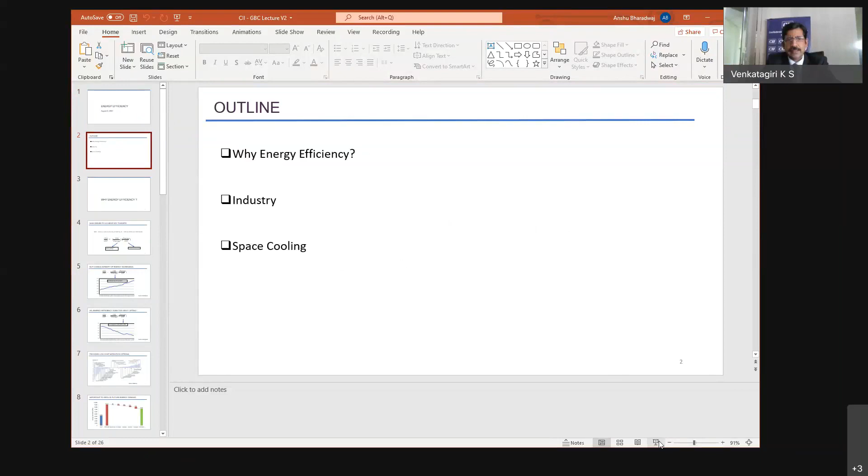So the presentation is broadly structured into three categories. One is why energy efficiency - not that we all know why it's important, but I'll try to provide some new perspectives on why it is important. So why energy efficiency, why is it important?

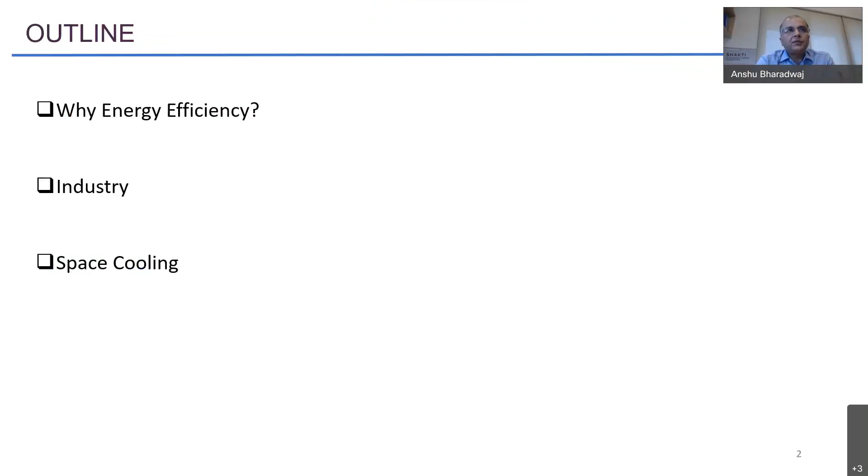And then I'll take a deep dive into two sectors and highlight some issues in industry and space cooling, because I thought these are very important areas where a lot of future action is required as we go further. So, why energy efficiency?

Now, there are several reasons, the most important being that it is the main driver to achieve the NDC targets. As you know, one of the important things we have committed to in our NDCs is to reduce the carbon intensity of our GDP by about 33% by 2030.

Now let's examine this mathematically. Basically, we are saying we will cut down our carbon dioxide per unit GDP by about 33%. You can slice this term into two components: the first is carbon dioxide per unit primary energy, CO2 over primary energy, and the second is primary energy over GDP. If you multiply those two fractions, energy cancels out and you get CO2 over GDP.

This is also a variation of what is known as the Kaya identity, named after the famous Japanese scholar who talked about this. The first term refers to the amount of carbon dioxide we emit to make one unit of primary energy, total energy, not just electricity. This depends upon the fossil intensity of our economy, how much we depend on coal, oil, gas, etc. The second term refers to how much energy we consume to make one unit of GDP, or the energy intensity of our GDP.

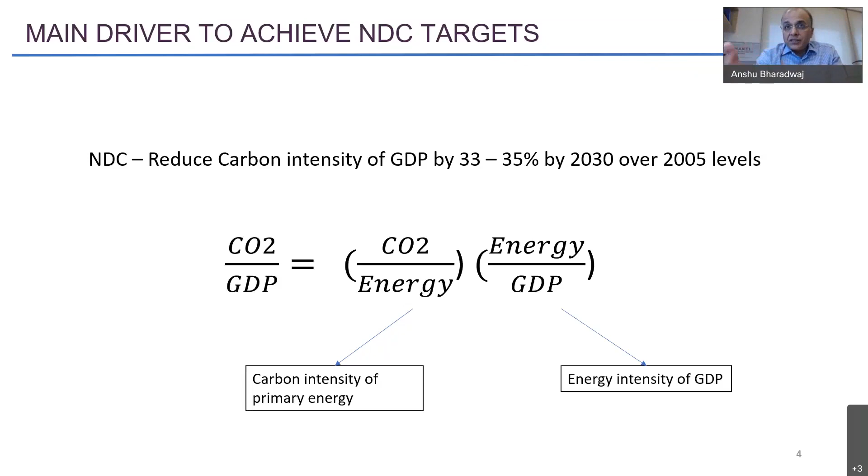Now let's see how each term has behaved in the past. Right now I'm focusing on the first term, which is the carbon intensity of our primary energy. This is an important graph, and I would urge you to think about it a little. This has been continuously increasing, that is, the amount of carbon we are emitting to make one unit of energy has been increasing over the last 25 years.

I'm using World Bank data, which goes up to 2014. But even if I were to take the last 5 years of data, this would still be increasing. Please bear in mind that this is despite all our renewable energy projections of solar, etc. This is an increasing trend.

Now, if we were to project this into the future, and we did this exercise about a year back, if we extrapolate and look at this curve till 2030, my own sense is that this will still be increasing, or at best it might plateau or gradually reach a peak by the 2030 timeframe. But I don't think it will decrease, and this is despite our renewable energy projections, solar, wind, everything. Why is that so?

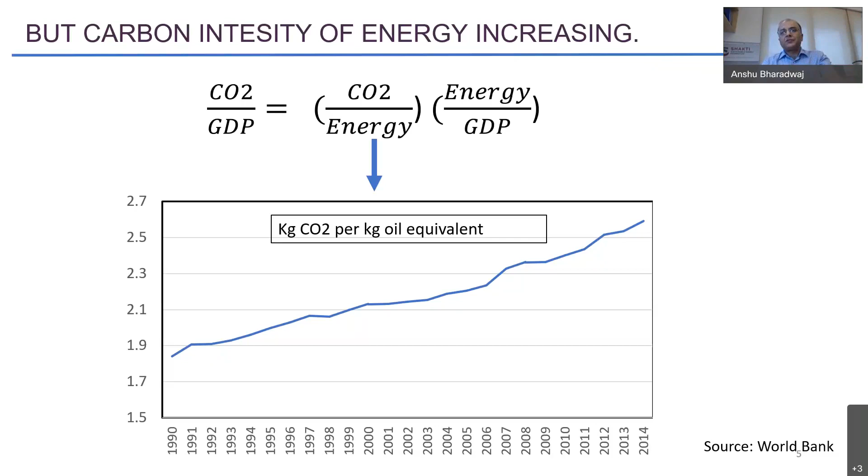Now let's see that graph. This graph plots the energy intensity of our GDP, again over the last 25 years of data. And this, as you can see, is a continuously decreasing graph. It sort of accelerated after we announced the national missions for enhanced energy efficiency. Those missions catalyzed our work in energy efficiency with the adoption of energy efficiency policies across a large number of sectors.

So this puts into context the importance of energy efficiency in meeting our NDC targets. Because unless we, in the NDC timeframe, are able to achieve NDC targets predominantly because of energy efficiency policy interventions. So I thought this sets the context and highlights why energy efficiency is an incredibly important component in our mix.

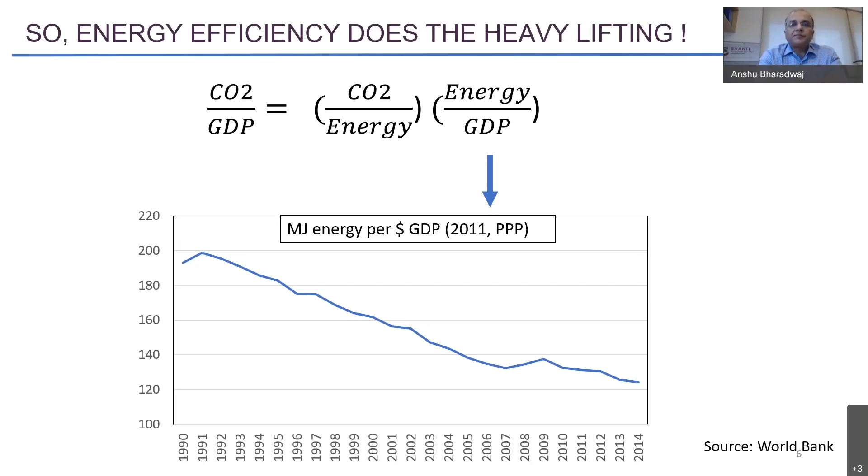Energy efficiency more often than not provides low cost mitigation options. I'm quoting a very famous graph which McKinsey has developed, which many of you might be familiar with, also called the marginal abatement cost curves. On the x-axis, they plot the abatement potential in gigatons of carbon dioxide per annum.

On the y-axis, they plot the abatement cost, that is euros per ton of carbon dioxide. So the width of the graph refers to how much carbon you can avoid, whereas the height refers to the cost. Now, one thing you'll notice is that a large number of interventions towards the left of the graph are all negative, for example appliances, HVAC, lighting to LED, clinker substitution by fly ash, and all those things. Those are all energy efficiency demand side interventions.

Why are they negative? The way they make this MAC curve is that they take an upfront investment which a consumer or the industry has to make, and then they take the annual expenditure. In some cases, the expenditure will be actual outflow, in some cases it will be savings. In most energy efficient devices, it is savings. If you install an LED, every month you have savings which accrue to your electricity account. So therefore, most energy efficiency interventions have a negative abatement cost, which is evident on the left side.

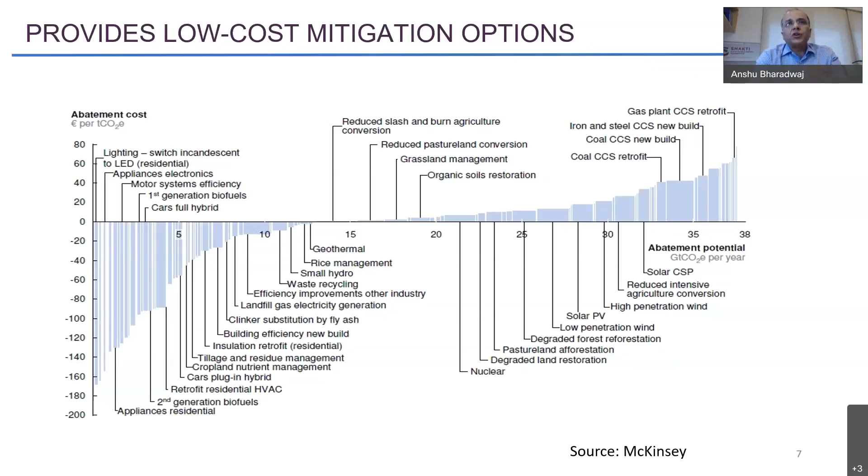And finally, if you look forward, this just plots the primary energy in 2030 and how the primary energy can reduce from business as usual to different levels. As you can see, a significant drop can be achieved by energy efficiency interventions across various sectors, most importantly industry, transport, and buildings, the three big sectors by which we can reduce. If we do a similar thing for 2050, the numbers are even more staggering, and we find that almost 25 to 30% of primary energy can be reduced by energy efficiency alone.

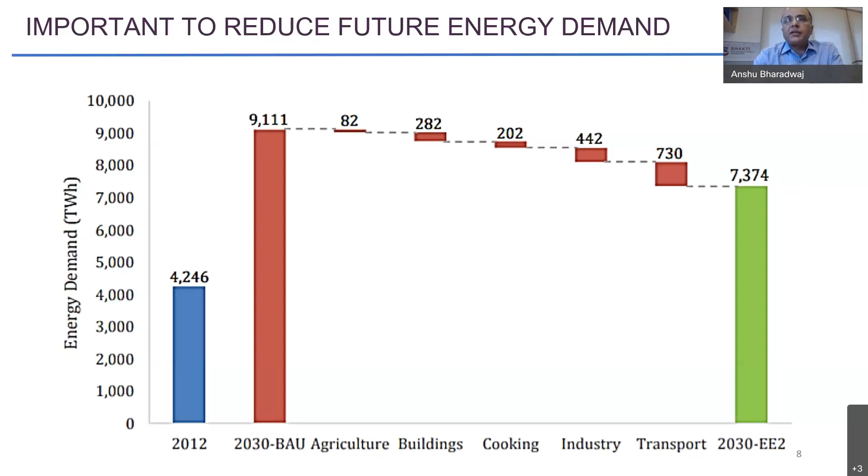So this is just to set the context why it is important. We all know, but it is just to reiterate. Now let me take a deep dive into two sectors and share some perspectives based on what we have done in these two areas. One is industry, and second is cooling.

Again, you are from CII, you all represent industry sectors, so you know this better than me. But as we know, given the way our GDP is expected to grow, industrial output is tipped to increase 3 to 5 times in most sectors by mid-century. I'm quoting numbers which have been quoted by the industry associations. For example, steel, today our output is about 125, 130 million tons. Most estimates peg this to increase to about 400 to 500 million tons by mid-century. Cement, we are at about 500, and that's expected to increase to about 1,500, 3 times by mid-century. And likewise, if you look at aluminium, chlor-alkali, textiles, the various sectors, outputs are significantly higher.

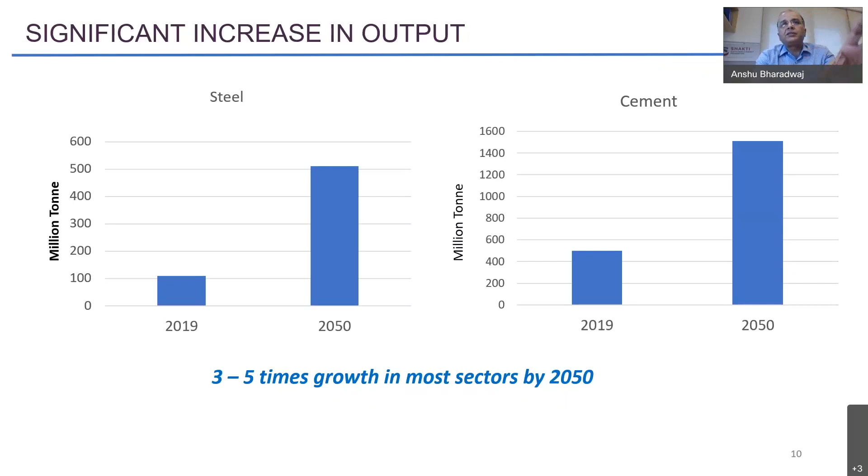I am picking these two because these are the two most energy-intensive sectors. The other challenge which this poses is that industry is a big consumer of coal. This pie chart shows the current coal consumption. Obviously, electricity accounts for about 65%, but the balance is industry. So imagine, even if we were to decarbonize electricity totally by solar and wind, etc., still there will be a large chunk of emissions which will be left behind, which will be industry emissions.

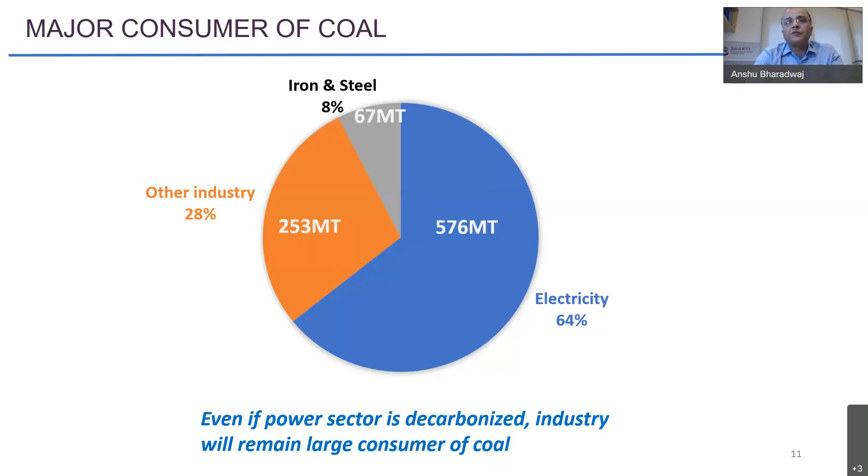And this number will only increase as we go along. In the previous slide, I talked about 3 to 5 times increase. So if we were to project this 20, 30 years from now, we are looking at 3 to 5 times the current emission levels just by consumption of coal and other fossil fuels. This plot highlights what I just mentioned.

Let me take a minute to explain this graph. The blue bars refer to the present emission levels, from electricity, industry, and transport. The orange bars refer to a reference scenario in 2050 in which we don't do much. The grayish bar refers to what if we were to do aggressive decarbonization. Now look at electricity. If we were to really go all out to eliminate coal and entirely rely on renewables, it's possible to decarbonize totally with a combination of solar, wind, hydro, nuclear, etc. We can totally decarbonize.

Industry, the orange bar itself assumes that all future industry adopts best practices in energy efficiency. So even with the best practices in energy efficiency, we are looking at about 2.5 billion tons of emissions from industry.

So that's an important takeaway point, that even with the best practices in energy efficiency, we are looking at about 2.5 billion tons of carbon dioxide in 2050. Now, if we were to look at various interventions, we might be able to bring this number down to less than a billion through various interventions.

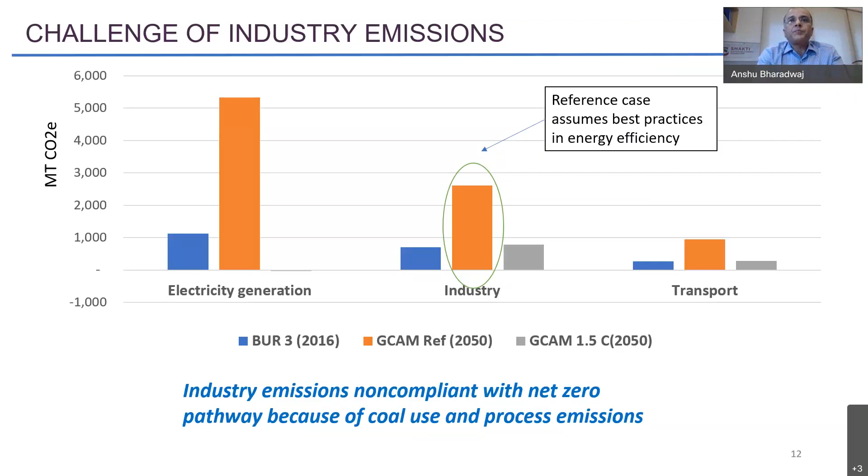So as Mr. Venkatgiri mentioned, in the first phase of our PAT program over the last 10 years, we relied heavily on market-based mechanisms to improve energy efficiency across industries like steel, cement, petrochemicals, fertilizers, chloralkali, and aluminum. It led to significant gains in terms of both energy saved and carbon dioxide avoided.

Today, as the graph on the right shows, this is the specific electricity consumption of Indian cement industries. As you can see, we are much better than the world average. Most of the recent cement manufacturing plants are actually world class in terms of their energy efficiency, absolutely top class. So cement is one area where we have done really well, and we are confident that going forward, most plants will be adhering to the best standards.

Of course, there is scope for improvement in steel. We have a mix of steel plants—some are very good, some are laggards in terms of energy efficiency. Our specific energy consumption on average in steel is still a bit higher compared to many other countries, despite the improvements under the PAT program.

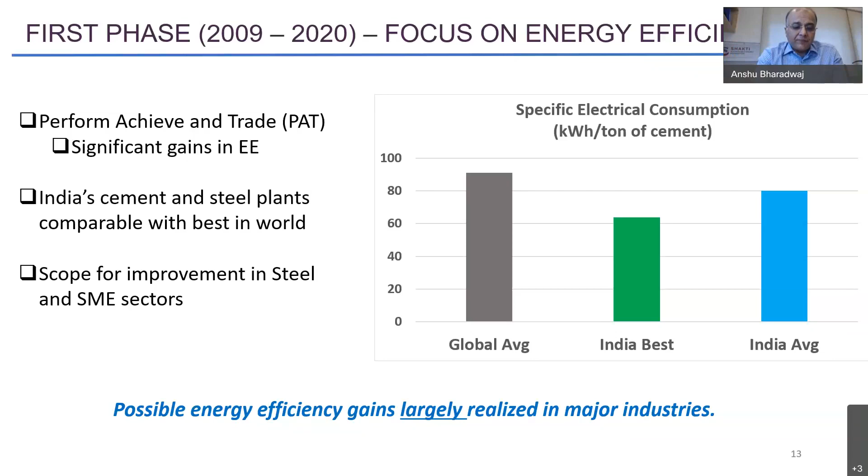So next phase, going forward. Now remember the previous slide where I said that industry emissions will touch about 2.5 billion tons in 2050. And that is despite the best energy efficiency improvements. So how do we mitigate that?

My own submission is that the next phase is going to be much harder. A lot of the good gains which we accomplished in the last 10 years were great, but I think we need to be prepared for a harder next 10, 20 years to mitigate about 2.5 billion tons. And there we'll need to look at things such as reducing demand of products, circularity, fuel switch, and shifting to electrification.

New technologies such as green hydrogen, CCS—I put three big question marks because I don't understand whether CCS is possible or not, whether it is technically, economically viable. I don't know, honestly. But that's one option being talked about, so I put it there. And energy efficiency, of course, for the residual sectors like SMEs and some others. But we'll have to focus on a collection of all of these to look at the next phase of industrial transition.

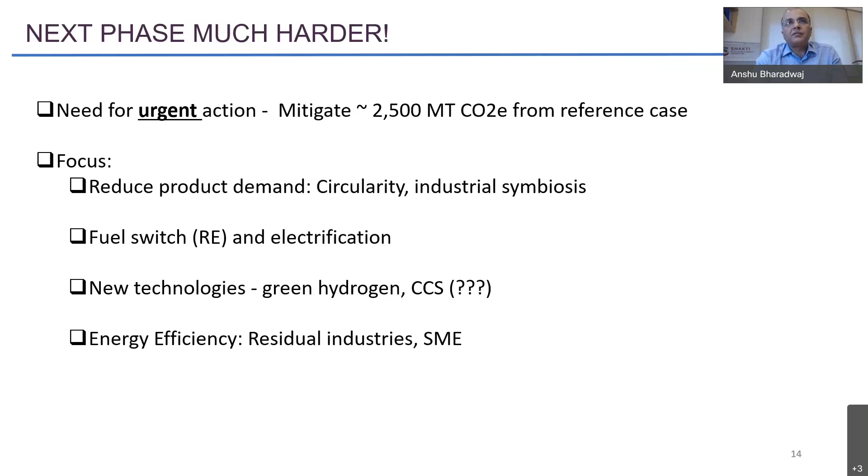This is an example I've taken from a recent report by TERI, where they examined the low carbon steel sector, and Shakti supported this report. So let's look at steel emissions in a business-as-usual scenario, where we continue with the current trend, and there we end up at about 800 million tons of carbon dioxide by mid-century.

If we were to improve the efficiency of our steel manufacturing, make sure it adheres to global best standards, that 800 comes down to about 700. So yes, there are residual gains to be made, but again, there is a limit. We can reduce by about 100 million tons by mid-century.

What if we were to do resource efficiency, recycling, and all kinds of things, where we reduce the commodity demand itself so that we manufacture less steel? In that case, we can bring down the 800 to about, say, 500. So I would say that is really the limit.

With the current set of steel manufacturing technologies, which mainly rely on blast furnace using coke—so if we really want to get to zero or close to zero, we will have to look at technologies which include hydrogen's use in the blast furnace to eliminate the use of coke or coal. That looks like what is emerging from this analysis.

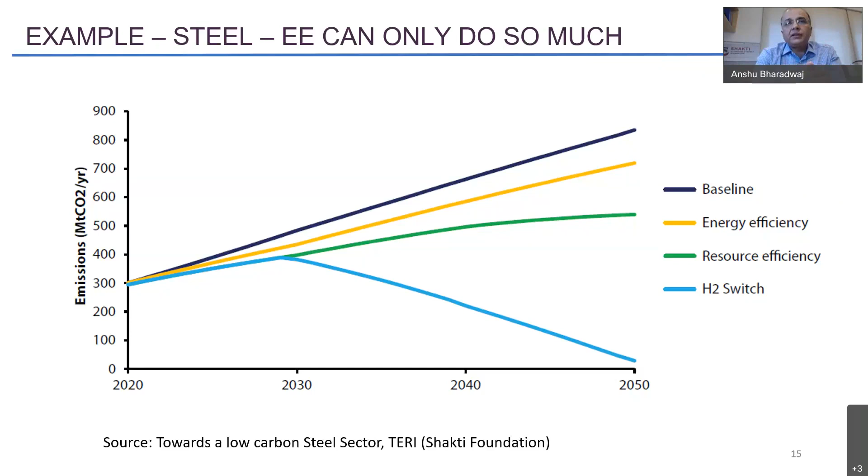So with that, that is a summary of what we discussed in industry. Let me give you some flavor of the space cooling sector and why this is an incredibly important sector, in about 10 minutes, and then I'll stop for question and answers.

This graph, I think, summarizes the need or the importance of this sector. This basically shows the global stock of air conditioners from now to 2050. India is the yellow band. If you look at today's scenario, that is 2020 or so, that yellow band is barely visible. We are a small fraction of the global stock of air conditioners. Whereas by 2050, by all projections, it is tipped to account for about 20 or 25% of global stock.

That's a very staggering number, considering the population base we have. In fact, today about 8% of India's households have ACs. That number is expected to increase to 50 or 60% by mid-century. So you can imagine the staggering growth that we're looking at.

And if you add to the fact that we are looking at more and more intense summers and heat, it only makes the case that much stronger. I recently attended a talk given by Mr. Chandra Bhushan of iFOREST, and he made a very nice statement that cooling is no longer a luxury. When we were growing up, during my childhood days, we could never imagine an air conditioner. It was totally unaffordable. Even a home cooler was a luxury, the one home cooler system. But now, with the kind of summers we are having, I would say cooling is a necessity, not a luxury anymore.

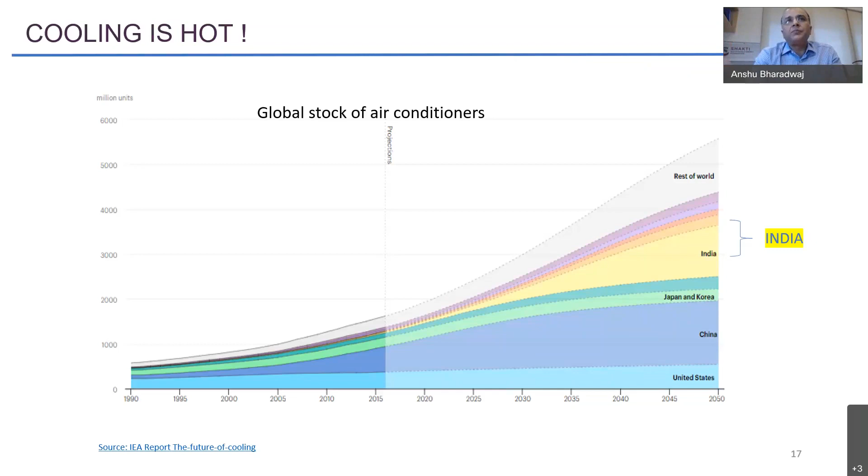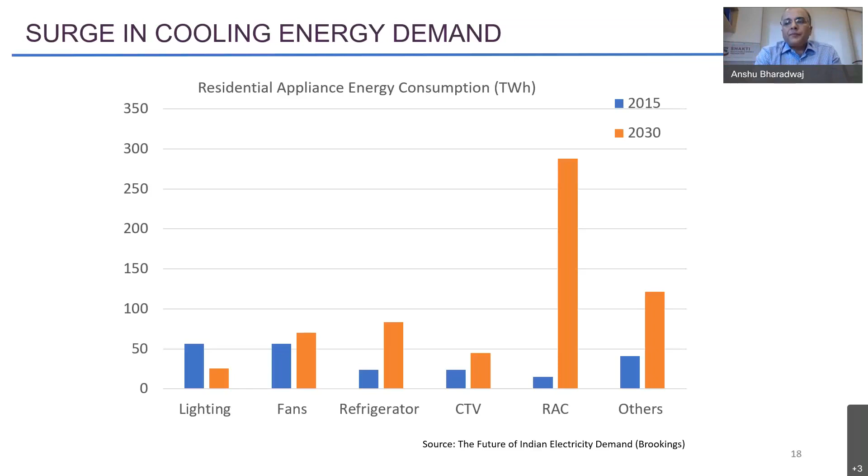So what you can make out is that we have two very sharp peaks. One is the afternoon peak, which is largely commercial, industrial, driven by that. What is important is there is a very strong and sharp night peak. That's when the domestic air conditioners come online and they run through the night. So we have a very strong continuous peak in the night at about 2000 megawatts in this area, which comes under TPDDL.

The take-home message here is that not only are we leading to a gross increase in energy, but we are also leading to peak demand. This is a very strong deterrent to renewables, because at least as far as solar goes, solar can help meet the afternoon peak, but solar can't help the night peak. So this only highlights the need to address this problem of reducing the cooling demand, reducing the energy demand from cooling, through efficient appliances as much as possible. Even if you can reduce it by 500 megawatts in this region, that's equivalent to one coal power plant.

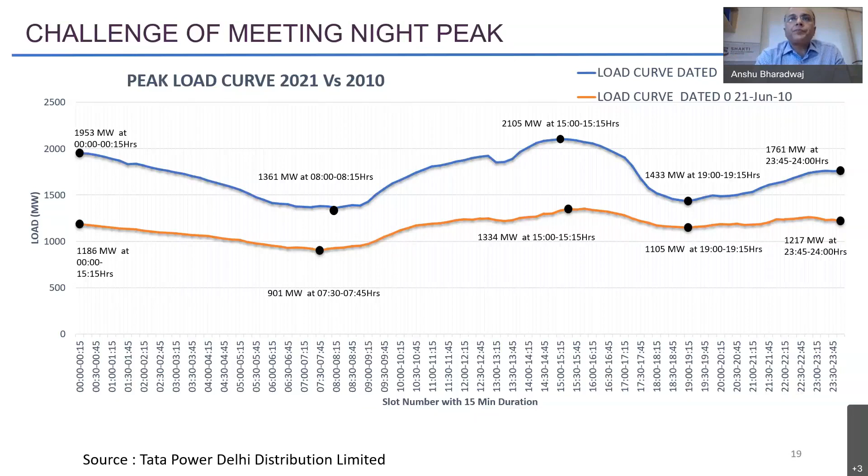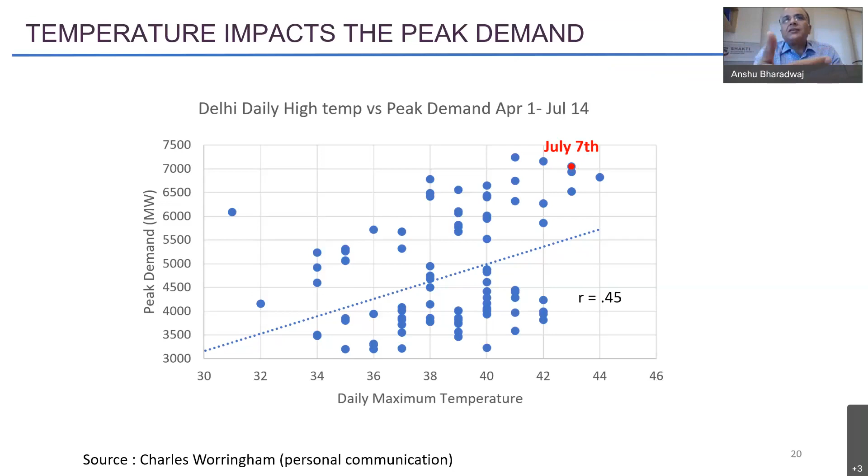And there was a rough trend which emerges of the correlation between the two. So this only highlights the need for energy efficiency and the need to address cooling demand.

Whereas if you compare that with countries like US, it's about 4, China is a little more than 4, Korea about 5, Japan around 5, and so on. So most of the ACs sold in India have an SEER of about 3 watts per watt.

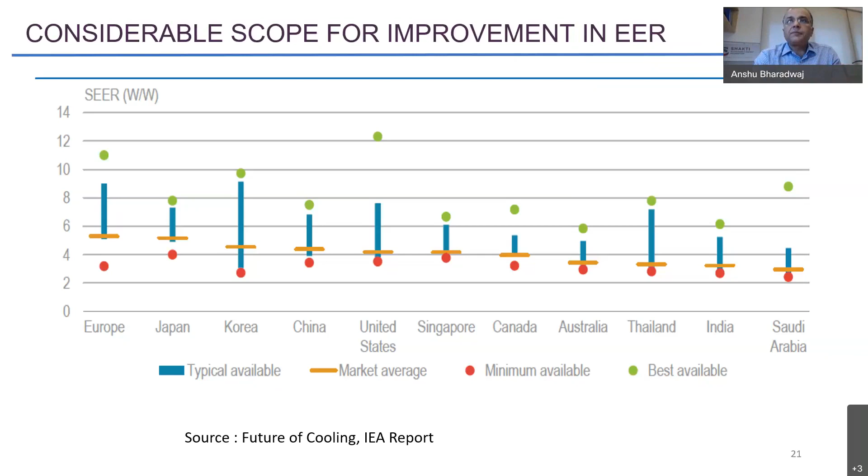So there's a lot of room for us to improve the energy efficiencies of the ACs sold in India. And as you saw in the previous graph, if we improve the energy efficiency of the ACs sold, we can significantly bring down both the peak and the gross energy consumption. But how do we expedite the adoption of 5-star ACs, and how do we go even beyond 5-star to more efficient ones available in other countries? Obviously, cost is a big deterrent.

I'm sure, as Saurav must have spoken in his earlier seminar, EESL has various options or models to reduce the cost of the appliances, but the challenge still remains in adoption. There are various ways by which we can bring down the upfront capital cost, consumers can pay as you save, etc. But I think a lot more needs to be done to ensure adoption than what we have done so far, and at a much faster pace, because the market is increasing very fast, whereas the adoption of policies has always lagged behind.

The other challenge with air conditioning and space cooling is the refrigerants. This is, I suppose, known to all of you, that the refrigerants we use in our cooling systems are either HCFCs or HFCs, and in some cases we have hydrocarbons or R290.

Under the Montreal Protocol, we have progressively moved away from this. We have completely phased out CFCs. We are on the verge of phasing out HCFCs, but HFCs are currently the bulk of the refrigerants being used in India. There are a few notable exceptions, such as Godrej air conditioners, which use hydrocarbons like propane or R290, with very low GWP, but HFCs continue to be the bulk of the refrigerants.

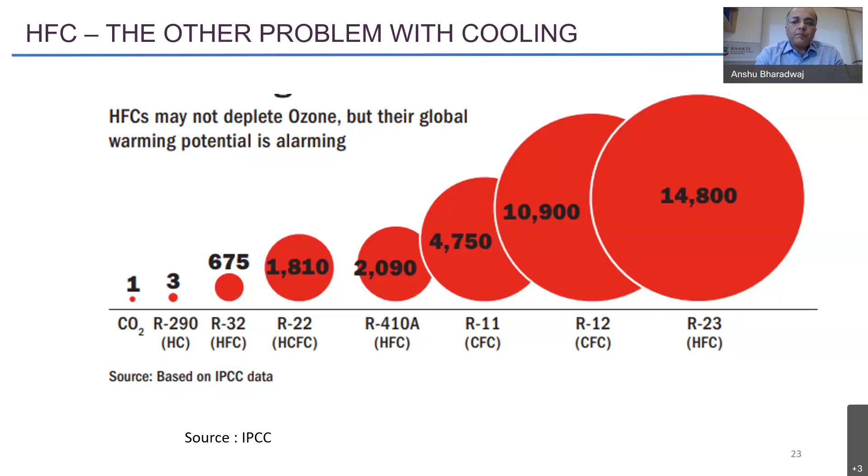Now, as we go forward, the Kigali Amendment to the Montreal Protocol talks about the need to reduce HFCs by over 80%. There have been estimates, and this will surprise you, that if we fix cooling, then by end of century, either through the adoption of super efficient refrigerators and the use of low GWP refrigerants, we will save at least 0.4 or 0.5 degree temperature increase if we manage cooling properly.

And therefore there's been the Kigali Amendment, the Kigali Cooling Efficiency Program, which is a global philanthropic initiative, and the India Cooling Action Plan, to reduce cooling demand, reduce refrigerant demand, and reduce cooling energy demand.

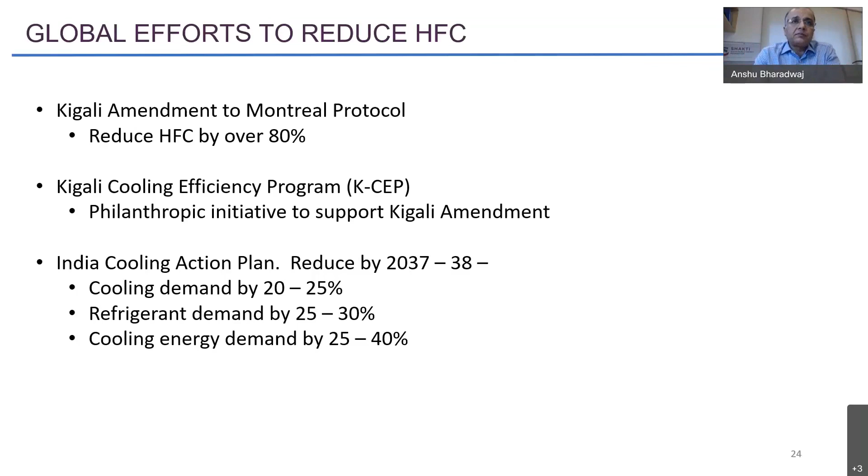But it's not easy. As I said, as of now, the bulk of our industry is heavily dependent on HFCs. How do we make sure we gradually phase out HFCs and bring in low GWP refrigerants like natural refrigerants and not-in-kind technologies? There are options to eliminate HFCs, relying on natural refrigerants such as ammonia, carbon dioxide, hydrocarbons, HFOs, and a whole bunch of NIK technologies which are different from the conventional vapor compression cycle.

But there are challenges to adoption. I would recommend, for those interested, a set of very nice reports published by iForest, Mr. Chandra Bhushan's organization, which highlighted these technical and economic barriers and looked at policy interventions for adoption of these measures.

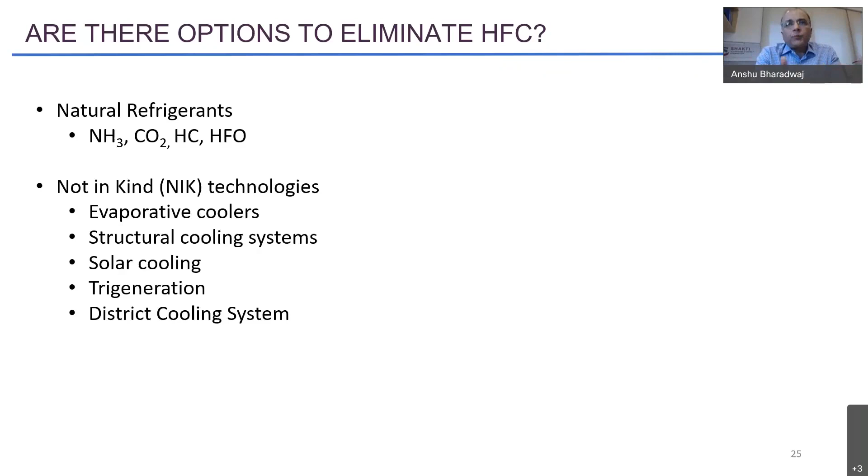Finally, this is my summary slide. There is enormous unrealized potential for energy efficiency, especially in sectors such as industry, cooling, and even buildings. We have done great work in the last 15 years. I would suggest a lot of low-hanging fruits have been tapped, and a lot of credit goes to industry, which reciprocated to the government's initiatives and did really well in these initiatives. But we have a much harder challenge ahead of us, especially in industry and cooling, to realize the goals.

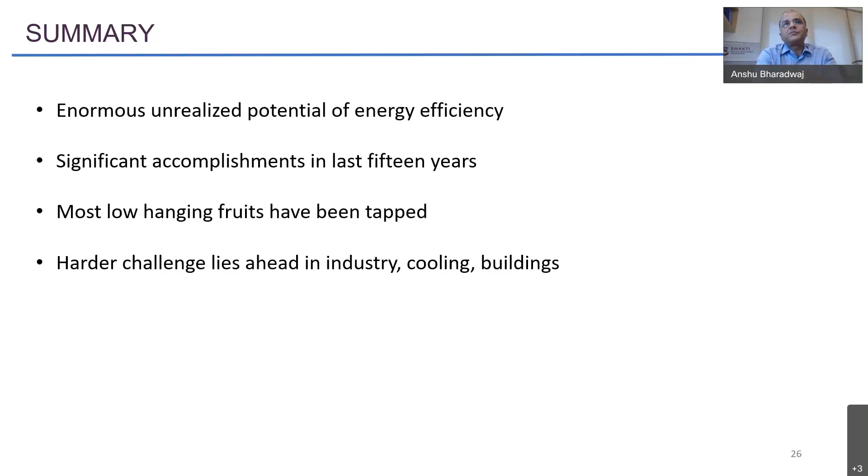So with that, I'll stop and would be most happy to have any questions and discussions. Thank you so much.